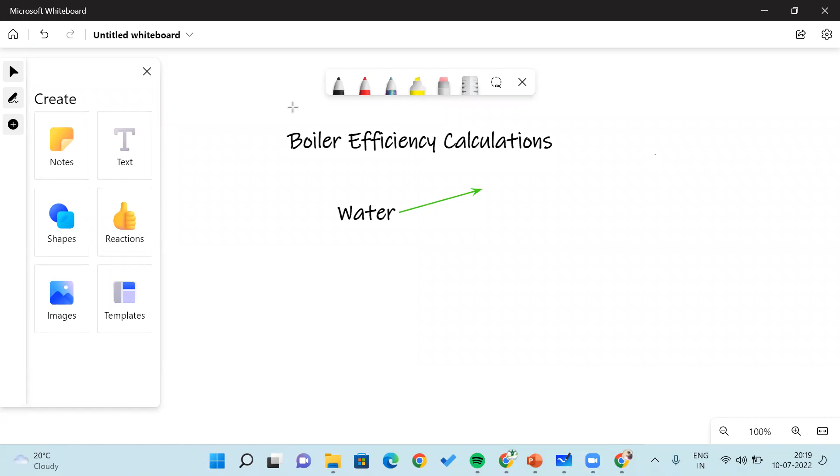The first thing is the availability of water - it's very cheap. Water is cheap. And the second thing is that water's specific heat is very high - the amount of heat that water can carry is very high. The specific heat of water is high, the CP value is very high.

And the third thing is, it is cheap and available, and the latent heat of evaporation is very high. In order to convert water to steam, or steam to water, the latent heat of evaporation is very high for water - the latent heat is very high.

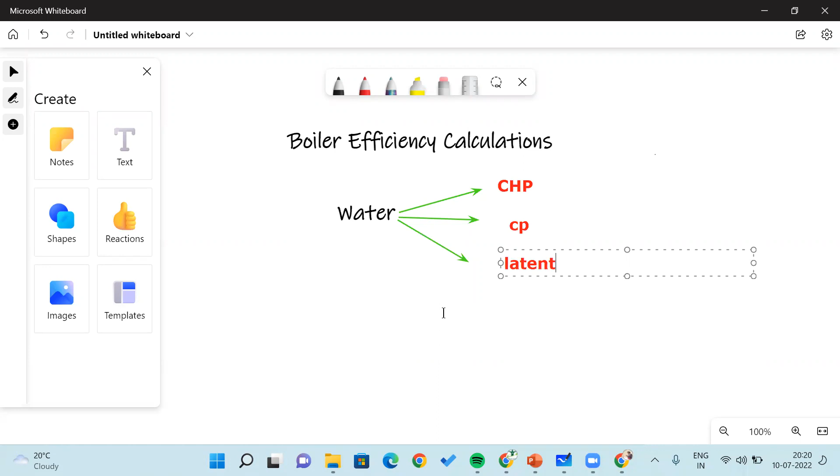Okay, latent heat is very high. And the final one, as somebody said, it's a universal solvent. But actually we are not directly mixing with anyone. Here the water is non-reactive to many of the materials. In industries, what are the materials that you're using? Mostly compared to other substances, other compounds, it is non-reactive. So this is another main reason. So these are the 4 reasons why you are using water.

For example, let's say first thing, why you have to use water: because it is cheap. Because it reduces your operational cost. Water is cheap and easily available. So that is the reason we are able to use it for operations where the operational cost is less. That is the first thing.

And the second thing is that the specific heat is very high. When the specific heat is very high, it can transfer more amount of heat. For just 1 degree temperature rise, it can give a more amount of heat. That is because the specific heat is high.

That is another reason. And the third thing is the latent heat. If the latent heat of evaporation is high, for example, let's say you are using water in a heat exchanger, because its latent heat of evaporation is high, even after heat transfer is happening, it can still remain in a vapor state, a steam state. For example, if the latent heat is less, and the steam, after losing its heat, gets converted to liquid,

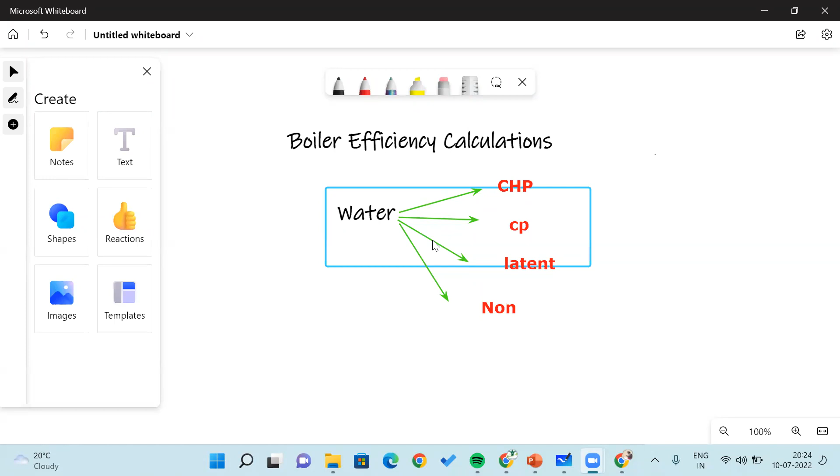So many things. But one thing you need to keep in mind when talking about water is, let's say you have a water bottle with you, and this water bottle's volume is 1 liter. If the volume of the water bottle is 1 liter, obviously we can pour 1 liter of water into it.

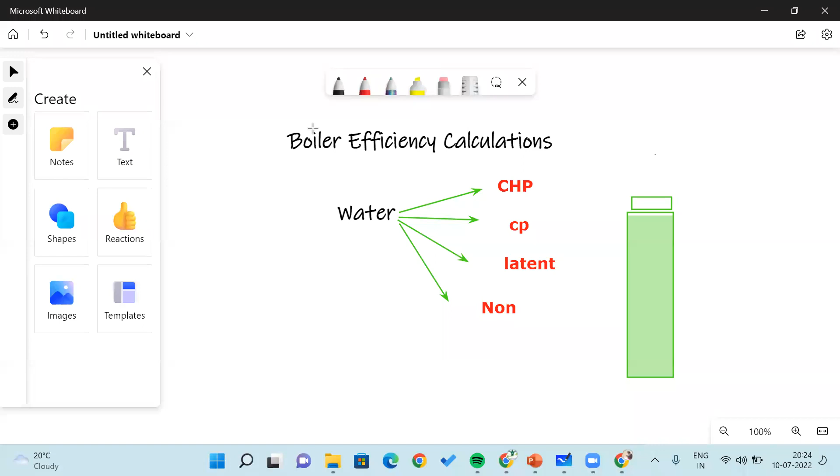And now let's say this is the vapor-liquid curve of water. So initially the water is in a subcooled zone, and from the subcooled zone it reaches up to the saturated liquid condition.

So after saturated liquid condition, it reaches saturated vapor condition, and then superheated vapor. This is the basic journey of water when you give it heat. Initially water is in liquid condition, in a subcooled zone or saturated liquid condition. But the moment water converts from saturated liquid to saturated vapor, it happens at the same temperature and pressure - at 1 bar gauge pressure, 120 to 129 degrees centigrade is the saturated temperature.

At that point, the specific volume is very less - you can put 1 liter of water in a 1 liter bottle. But after that, the water converts to saturated vapor at the same temperature, taking latent heat. Then you require 8,000 times more volume. That means to put 1 liter of water in a saturated vapor state, you'd require 8,000 water bottles - just by changing temperature, getting from saturated liquid to saturated vapor condition, the volume drastically increases.

So when there is a sudden change in volume because of a small difference in temperature, you can see a huge explosion. That's the reason the boiler is the place where water converts to steam - there's a huge specific volume change, requiring very huge volume. That's why when designing a boiler, we don't design it like a normal vessel or normal closed equipment.

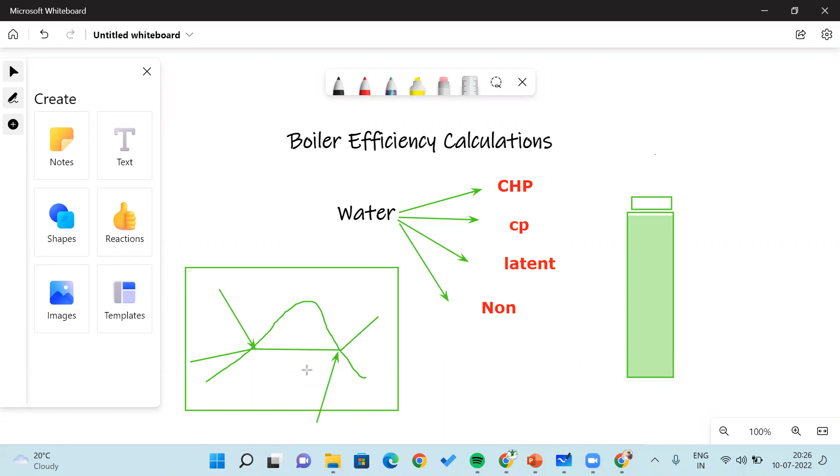Now coming to further discussion - this is the place where, as I told you, we are talking about different applications. There are different kinds of things available here: heavy users, medium users, and light users.

The heavy users are food, pharmaceuticals, oils, and other industrial level applications. When it comes to medium users: HVAC systems, cooking, chilling, fermenting, treating, cleaning - all these are medium users. And very light users are electronics, horticulture, and humidifying. So you can divide these into three categories: heavy, medium, and light users.

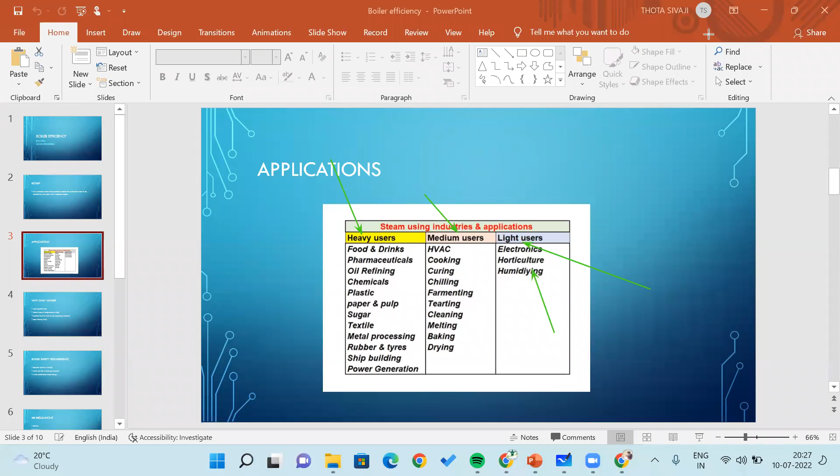After that, we discussed why water is used - we already discussed high specific volume being a major reason, and the boiler acts like a fired gunpowder. When there's a sudden change, that 1 liter volume converting to 8,000 times more, obviously it's like a fired gun. So the vessel design comes under the category of fired pressurized vessel design.

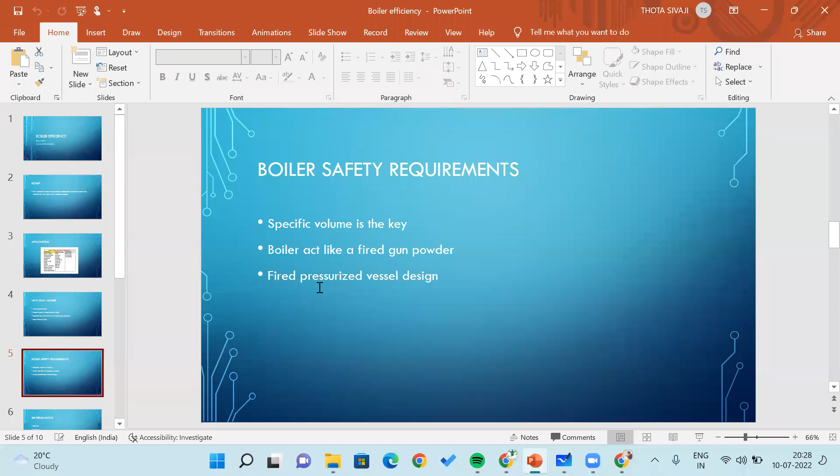In such a category, you have to design with a lot of regulations. Now coming to what I've explained till now - these are basics, very basic things related to boilers. Once again, if you read any PDF, I will share one with you, you can get more knowledge related to that. There are IBR regulations.

What are these IBR regulations? If the boiler - any enclosed volume - if you're trying to heat water or convert water into steam, if there's an enclosed vessel and you try to heat it, whenever the volume of that particular thing is greater than 22.75 liters, then it comes under IBR. That boiler needs to be designed as per IBR regulations - there are many huge regulations. If you search IBR regulation on the internet, many standards will come up, and based on all those standards, it needs to be designed. So if the volume of an enclosed vessel crosses more than 22.75 liters, that is one thing to note.

Or else, when you're operating an equipment like a steam engine, when you're converting water to steam which is greater than 3.5 bar gauge pressure, at that time also you have to go for IBR regulations. It needs to be designed as per IBR regulation.

And the third thing is the steam piping. When steam is moving through a pipe, if the piping is greater than 245 nominal diameter, then also we will use IBR regulations as a boiler standard. So if you just type IBR regulations in Google, different standards will come up. So these are the limits.

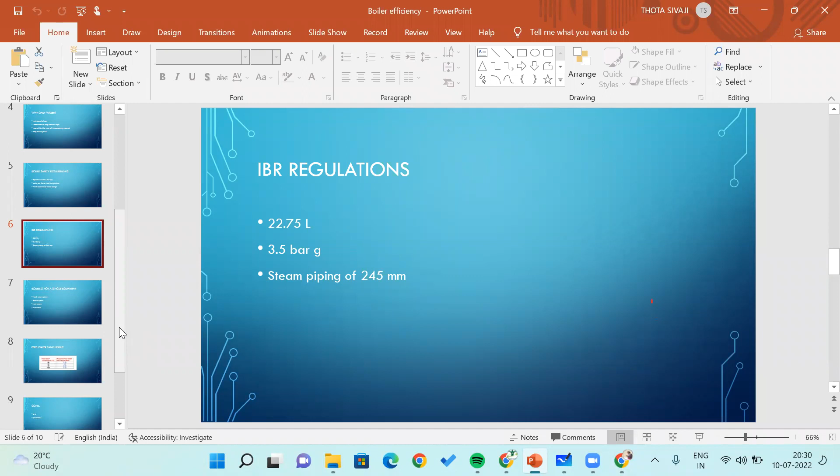Now, when you are talking about a boiler - we just discussed a boiler - remember, a boiler is not a single equipment. Like when you say distillation column, there is a reflux drum, a reboiler, a feed pump - the distillation column has different equipment, different setup. Similarly, a boiler is not just a single equipment put there. The boiler is a combo of different kinds of things. Many things are involved in the boiler combination.

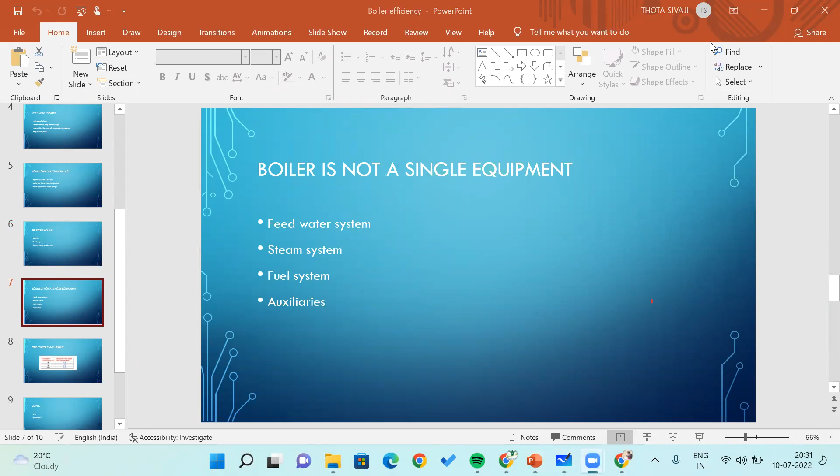So here I'm mentioning feed water system, steam system, fuel system, auxiliaries - there are many things mentioned in a boiler. So if you look at a boiler, generally, if you go for a general schematic diagram of a boiler, consider this is a boiler - what are the inputs for the boiler? As per your knowledge, what can be the input for a boiler? If you consider that entire boiler system as a vertical box, what are the inputs or outputs for the boiler, as per your opinion?

Rajneesh said feed water plus fuel. Process steam or outputs - Manupali, Badri Narayan said treatment dosing chemicals.

Okay, we will discuss one by one. I think you already know, but to type it or for your imagination, it takes some time. But anyway, I will explain one by one.

So first of all, you require fuel. Fuel needs to be entered and burned, and it needs to give heat. So fuel is required as an inlet, that's the first thing. The second thing is you need to give water. Once the fuel is giving heat, who needs to absorb the heat? The water needs to absorb the heat. So we require water.

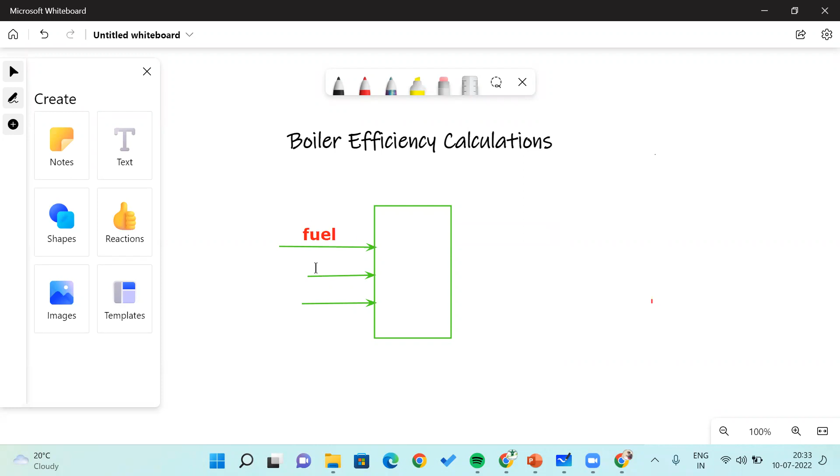And just by sending fuel, it's not going to give you the result. We also required air supply. So we required fuel, we required air, we required water - these are the things that are required. And when you're giving all these things as inlet, what comes out? We are getting steam as an outlet, because that is the major product for us. That is steam.

We require steam, and because there is a burning process, you can expect some flue gases. There's an expectation of flue gases, and since we don't know what kind of fuel is being used—solid, gaseous, or liquid—there's some ash formation that will occur, and that ash can come out of it.

If you are giving water, the water is getting evaporated. Once the water evaporates, the TDS in the water increases—the dissolved salts and everything gets increased in concentration in the boiler. Because of that, you need to give a blow down option. There is a blow down option, so we need to go for a blow down.

When you're going for a blow down, there's again an option of makeup water to the boiler that you can add, or you can ignore that. So we have different inlets and different outlets to the boiler: inlets of fuel, air, and water, and outlets of steam, flue gas or effluent gas, blow down, and ash. So this is the overall situation.

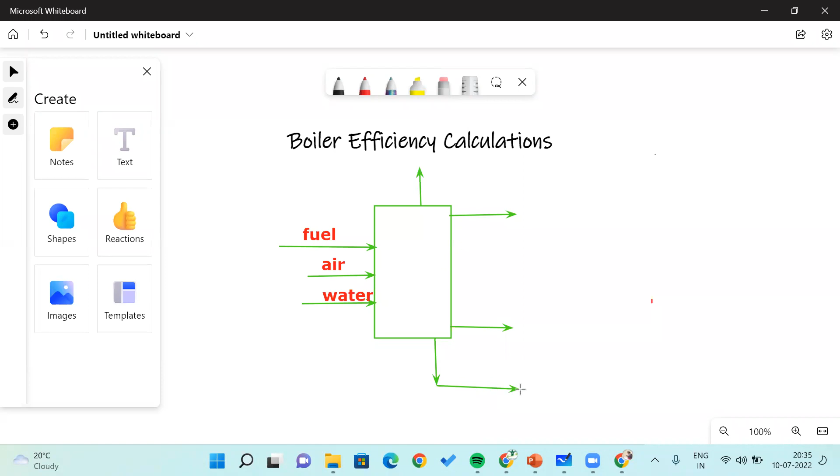Let's look at the different kinds of things entering the system. First of all, fuel. There are three kinds of fuels: solid fuel, gaseous fuel, or liquid fuel.

For example, when it comes to fuel, let's say we have a coal particle. If you have a coal particle and you're burning it, you require oxygen from the atmosphere—from different directions oxygen needs to be supplied, and then it burns. After some amount of burning, what will happen?

After burning, some amount of energy is released, and there will also be formation of ash. Whatever ash is formed, it is not allowing atmospheric oxygen to reach the surface for further burning. So because of this burning process, the ash that was formed is not allowing oxygen to reach the inner surface, and because of that there is a chance of reduction in combustion. So the ash acts as a mass transfer resistance.

So when you're giving solid fuel as an inlet to the boiler, there may be chances that formation of ash or other products acts as a mass transfer resistance to oxygen. Because of this, there are efficiency regulations related to the fuel feed. That's why there are different systems like the pulverization unit.

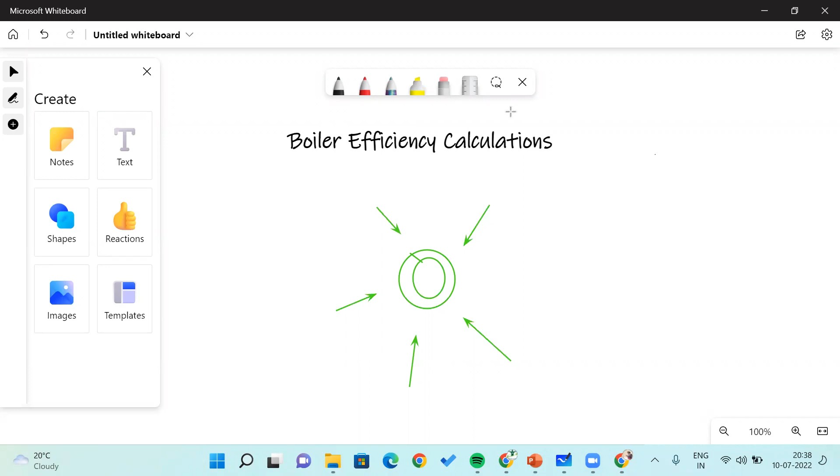Now when it comes to water—the boiler feed water needs to have a particular quality and meet certain requirements. You should not have dissolved gases, and you should not have other kinds of salts like magnesium or calcium.

You should not have such kind of salts in the water, because if the water entering the boiler is too dirty and has too many pollutants, it is going to scale up the boiler tubes and rupture the entire tube. This requires huge maintenance and causes damage, which costs a huge amount of capital for the industry.

That's why the boiler feed water should have a previous pre-treatment, like RO plants, based on your requirement. Based on whether you require demineralized water, you need to pre-process the water. So whenever there is water entering, it needs to be pre-processed first, there should be a pre-processing unit for the boiler water which is entering.

After the water is pre-processed and clear, whatever water comes out, which is very well cleared, needs to go to a feed water tank. Whatever the feed water that we have, which is purified, that needs to go to a feed water tank.

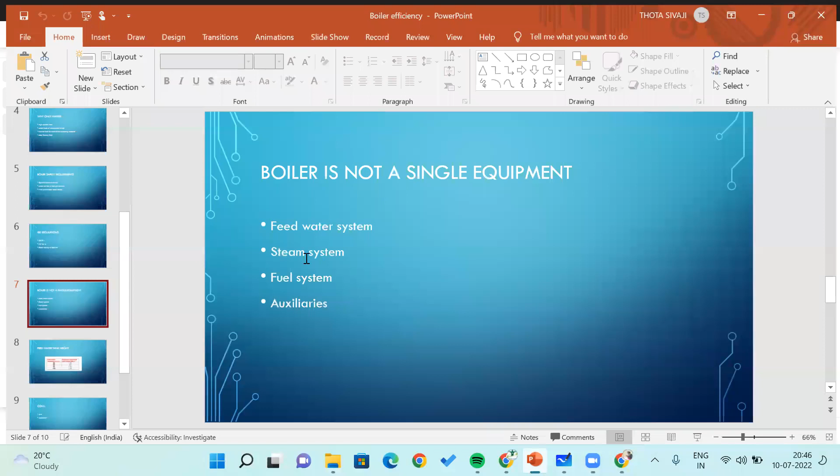There are some ground rules here. If the feed water temperature is 86 degrees centigrade, then the height required is 1.5 meters. If it's 90 degrees, 2.1 meters. If it's 95 degrees, 3.5 meters. If it's 100 degrees, 5.2 meters. Like this, you need to maintain height in terms of meters from the ground - these are the feed water tank heights.

Like this, there are other things like boiler feed drum and deaerator tanks also, which we will discuss - we are not going to discuss that part now. But the boiler feed water system is very important to learn about - some schematic diagrams that you need to understand, because most of the energy integration that you are going to use is at the boiler feed water system, and you need to understand the basic things related to the boiler also.

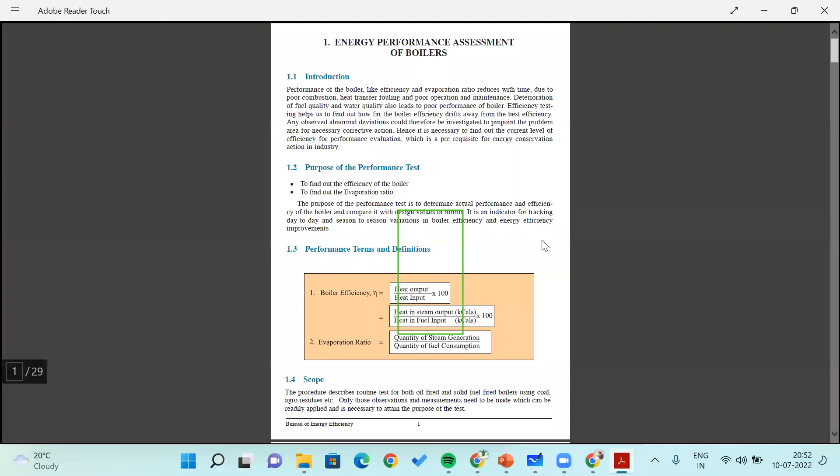Okay, so look at here. I'm going to share this PDF with you all later, for the people who attend this particular session. So for anything, the efficiency is nothing but heat output divided by heat input into 100. Output divided by input into 100, that is the basic. So now, what is the input and what is the output to the boiler?

So let's talk about the inputs. We are having a fuel input, an air input, a water input. And we are having a steam outlet, a flue gas outlet, a blowdown, and an ash out. So like this, we are having different kinds of things.

So now, what is the heat input to the system? The amount of fuel burning, the amount of energy that it gives, is the heat input.

For example, 10 kg per hour of fuel is entering. So the 10 kg per hour of fuel into its gross calorific value is nothing but the amount of heat that you are giving. That is the input.

And what is an output? Here you are getting flue gases, blowdown, ash — these are all not output. The major product for the boiler is steam: how much amount of heat it has gained. Initially we were having some water, and after that it's converted as steam. So the gain, how much amount of heat is gained, is only the output.

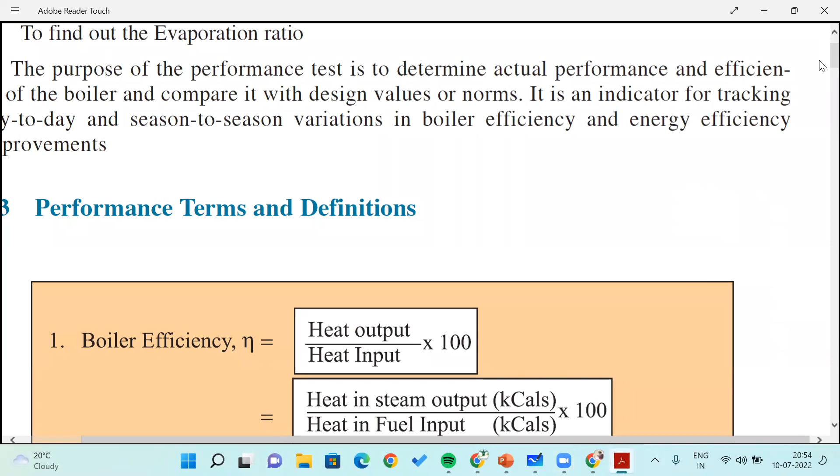You can write it as heat output divided by heat input into 100. What is heat output? Heat output is nothing but heat in steam output. So the whatever heat that is there in the steam is output, and heat in the fuel is input.

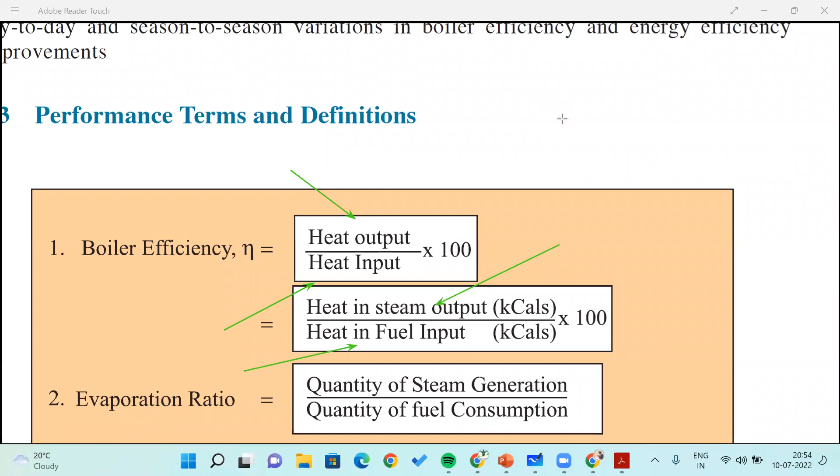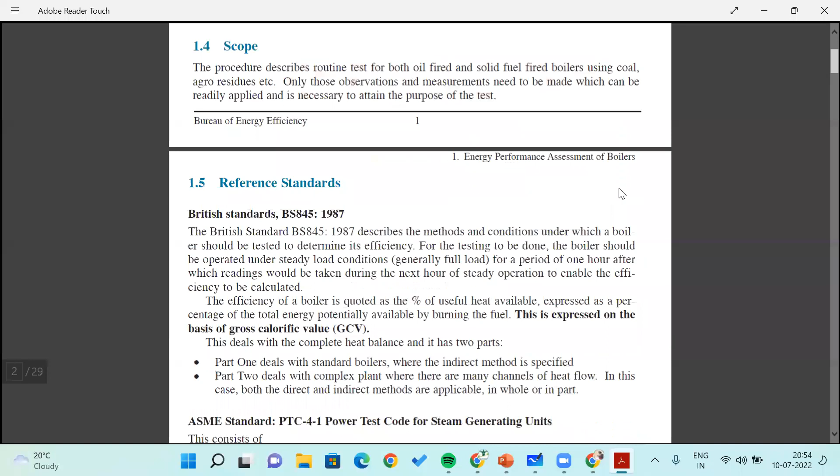So now, how can you write it? For example, this is a system where we are having fuel input plus air, and there is a steam outlet coming and the flue gas is coming, and then we are giving a water inlet.

Now, the energy output is nothing but the energy added to the steam. The water is taking heat and converting into steam. So that means it is the energy added to the steam. Initially, water is at 35 degrees centigrade, and it takes heat up to 120 degrees centigrade and is converted as steam and leaving. So 120 degree steam's heat minus 35 degree water's heat is nothing but heat gain.

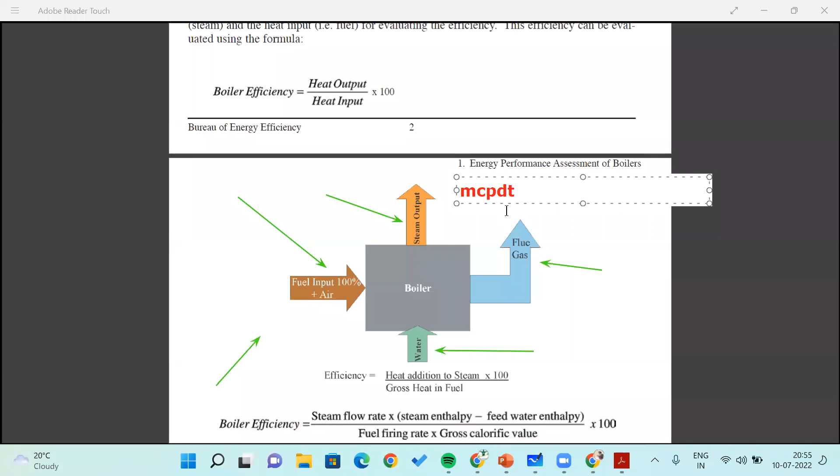The steam which you are having has a value of Q equal to MCP delta T. This has some delta T value. And here the water is also having some MCP delta T, which also has some delta T value.

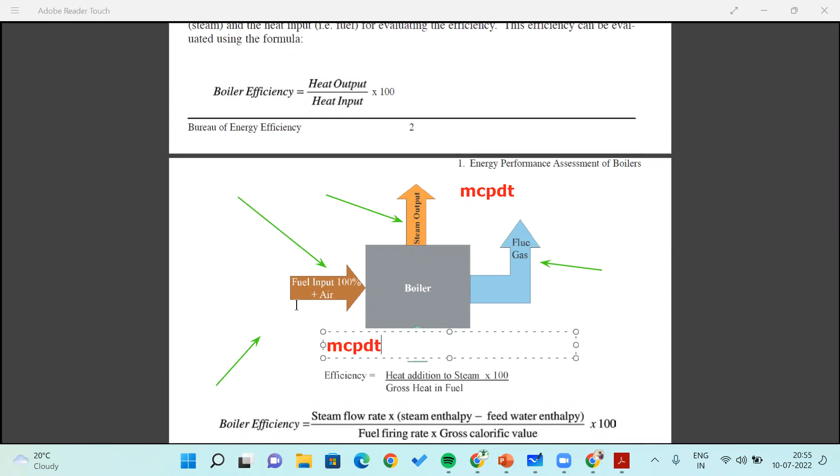So the difference between the output and input for the water is how much it gained — that is the heat taken from the system. So that is the output, the value that you're getting. So that is the heat addition to the system, which is added.

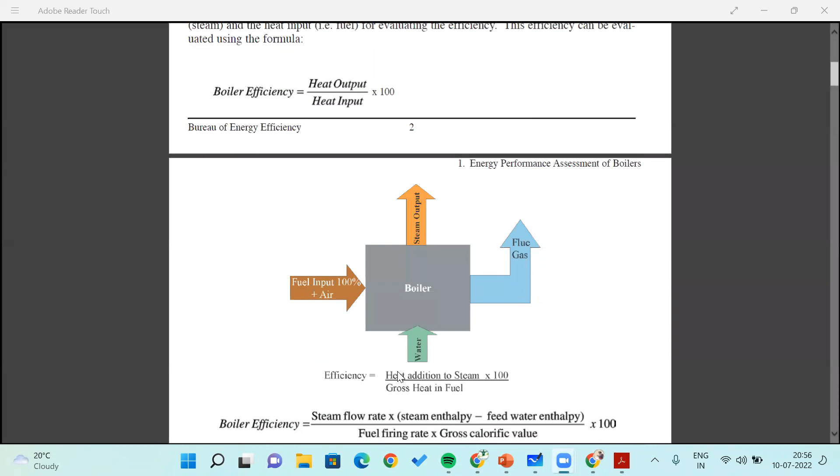See, the steam flow rate is the same — the overall amount of volume, the mass is same — and then we take the steam enthalpy and the water enthalpy. Then there's the fuel firing rate: as I told you, 10 kg per hour into the gross calorific value into 100. So this is the basic formula.

The basic formula for boiler efficiency is the direct method. It is just a direct method. For example, if I — just a minute.

Just a minute. Yeah.

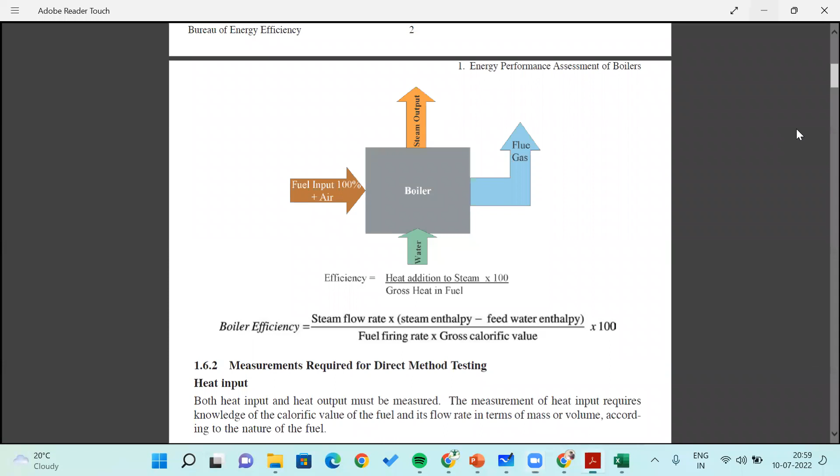So that is the reason there is an option of indirect calculation. Indirect boiler efficiency calculations are coming into the picture. I will give you the idea about indirect boiler efficiency calculations now. Indirect calculations are very important. Now we are going to talk about that one - indirect boiler efficiency calculations. So what is it exactly?

Let's say we are having a boiler. As usual, what is the inlet? Fuel is inlet, air is inlet, water is inlet - air, fuel, water. The outlet is the steam, flue gases, boiler feed water, blow down, and then we are having ash or something like this. So we are having something like this.

Let's say water is entering. So obviously the firing is happening, so definitely there is a very huge amount of temperature in the boilers - because of the fire burning, very huge temperature, like 300, 400 degrees centigrade. So very huge, incremental temperature. Now tell me, we are having air. What is air? Air is nothing but oxygen plus nitrogen and some other inert gases.

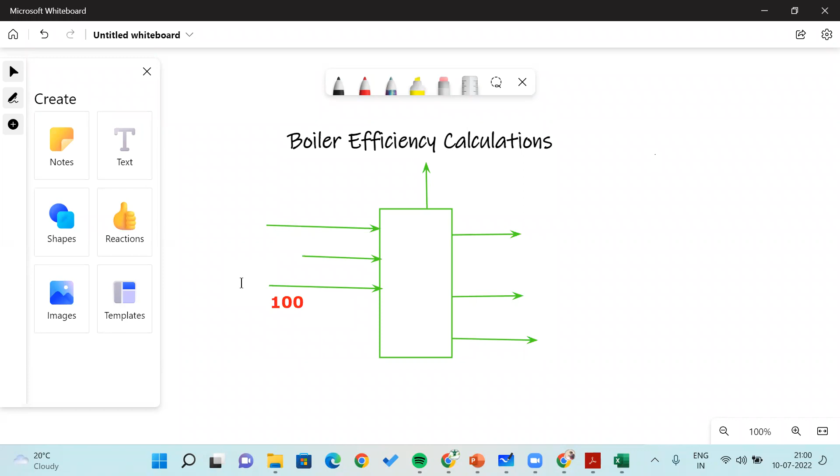For example, if you are taking 100 kg mole of air - let's say 100 kg mole of air - out of that 100 kg mole, how much air am I really using? I am using 21 kg per hour of air, or 21 kilomole per hour. That means the air contains both nitrogen and oxygen, but in the practical case, only oxygen helps the burning process. So the oxygen gets burned, but the remaining nitrogen, whatever amount we have, enters the boiler, takes the heat, and leaves.

So that means the nitrogen is storing the heat. The nitrogen comes at a normal room temperature of 35 degrees centigrade as air, and it enters the boiler and takes heat at 300 degrees centigrade, and then leaves. That means it's storing the heat, it's taking the heat. For example, you are having 100 kg mole of air here. Let's say that we are having a fuel firing rate of 15 kg mole per hour.

If the 15 kg mole per hour is a fuel firing rate, for one mole of fuel if you require 1 mole of oxygen, but you are having 21 moles of oxygen, you require only 15 moles of oxygen, because 1 kg mole of fuel requires 1 kg mole of oxygen. For example, CH4 plus oxygen gives CO2 plus H2O. If that is the equation, 1 mole of methane requires 1 mole of oxygen to burn. In this case, for 15 kg mole per hour of fuel, you require 15 kg mole of oxygen, but you are having excess amount of oxygen.

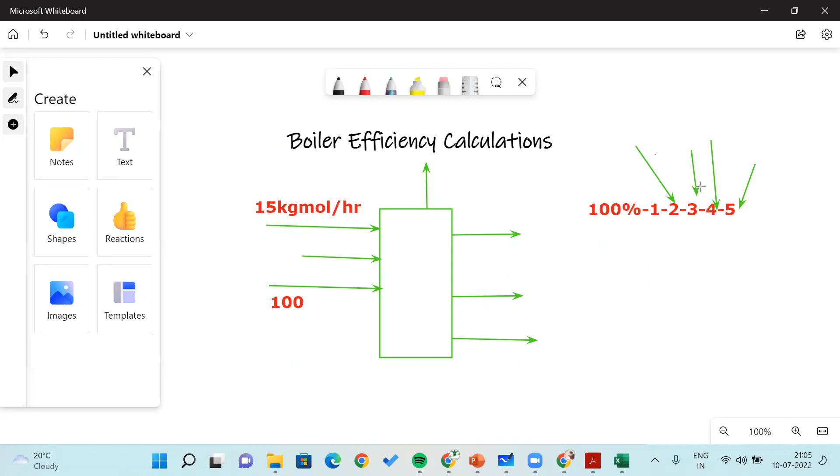Now we would like to look at the same in the PDF.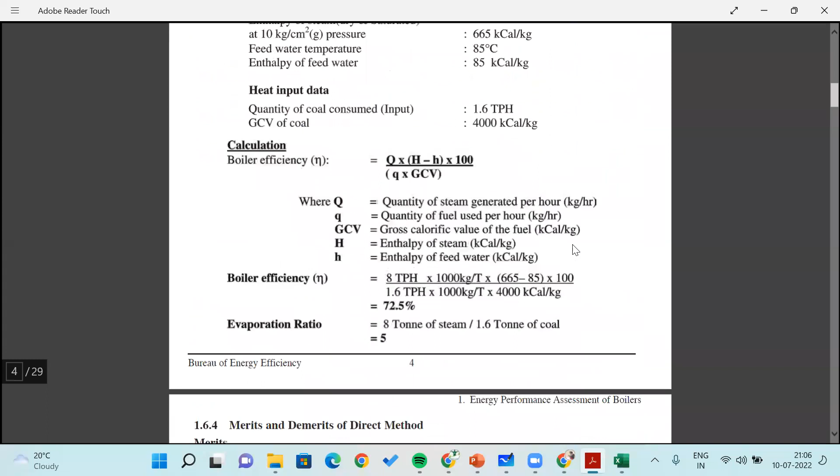Okay, now look at this, this is the indirect method. So there are different losses. Dry flue gas losses - what are the flue gas that you are having? What are the gases, like when methane is burning, so obviously what will come? Carbon dioxide, hydrogen will form. So whatever reactant is coming, whatever gas is forming in the reaction is also taking heat, so the dry gas is having a loss.

And H2 loss, as I told you, if there is a presence of H2, that is converted to water, so that is also a loss here. And moisture in fuel, moisture in air, as well as CO loss. When does CO come? When there is no proper combustion, when there is incomplete combustion, then CO will form, meaning the fuel is not burning properly. So that is also a loss, that is the CO loss.

And then fly ash loss - that means ash loss is nothing but when these flue gases are going out, there is some ash which comes from the stack, so from that also there is a loss. And you can see from the bottom, ash loss, obviously there is ash which is coming, that is also having some loss. And then there is a blowdown loss.

So 100 minus, okay, efficiency is nothing but 100 minus first loss, second loss, third loss, fourth loss, like this. All these things will come up with the indirect method. Okay, all this will come into the picture, and then they will end up with what is called the indirect method.

And there is another loss called surface loss. Because every body which is greater than 0 kelvin radiates, so there is a radiation loss also there. If there is no proper insulation, obviously the convective losses are also there. So there is a loss.

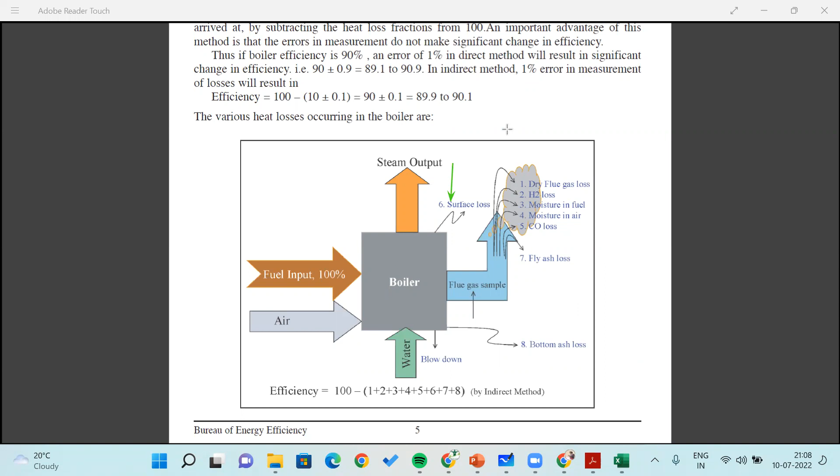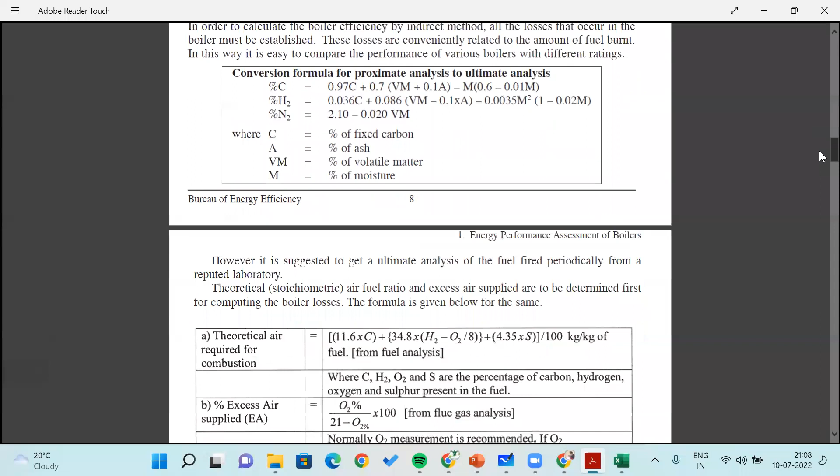Now, so here for each and everything, we have a formula, a defined formula. Let's say heat loss due to dry flue gases - for that we have a formula: M CP delta T divided by gross calorific value of fuel, into 100. So in order to find out the L1 loss, we have this formula: M CP delta T, temperature of flue gas minus temperature of air, ambient air, divided by GCV. So this is the formula.

If you are able to know - okay, you need not to mug up the formula, you just need to understand what is L1. That is because of dry flue gases. So for the dry flue gases, this is the formula. So if you have the data, you just need to substitute the values and you will get the loss because of flue gas.

Okay, you need to get this kind of data. You need to know what is the temperature of the flue gas. So there you need to take all the parameters, study all the parameters on the boiler. You have to be ready with all the stuff, and then you need to go for calculation. So this is the loss because of L1.

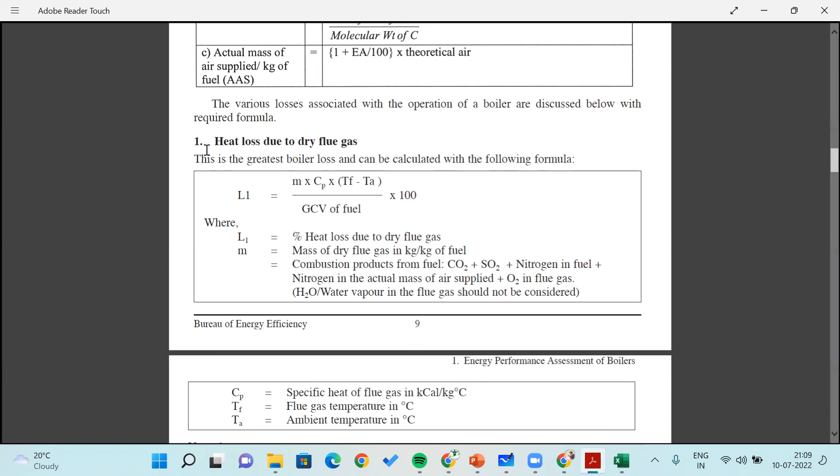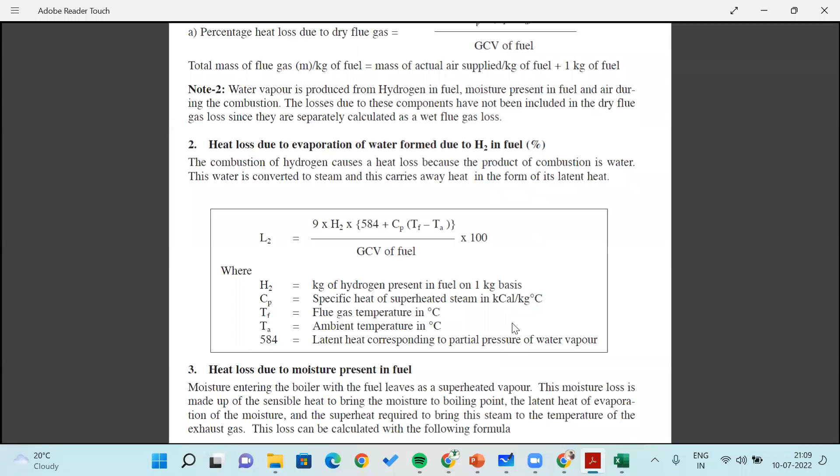And then heat loss due to evaporation of water formed because of H2 in the fuel. If there is H2 in the fuel, there is formation of H2O, and because of that, what is the loss? Here already they calculated all the parameters, all the mole balances, and end up with the formula: 9 into H2 into 584 plus CP. So what they are doing is simplifying the formula, and this is the final formula for L2. Directly we can put 9 into H2, all the values here. The data is there - you need to get all the data from the boiler, then you enter this and you will get L2.

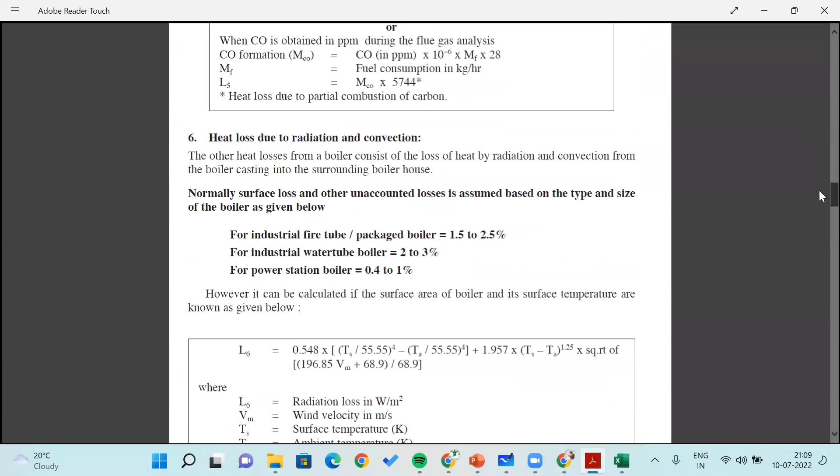So like this, L3, L4, L5, L6, L7, L8. So like this, all the things will come together: 100 minus (1 plus 2 plus 3 plus 4 plus 5 plus 6 plus 7 plus 8). It is nothing but the overall indirect efficiency calculation, the overall calculation where you can concentrate. If you find there is a huge loss because of radiation, what will you do? We will put the insulation.

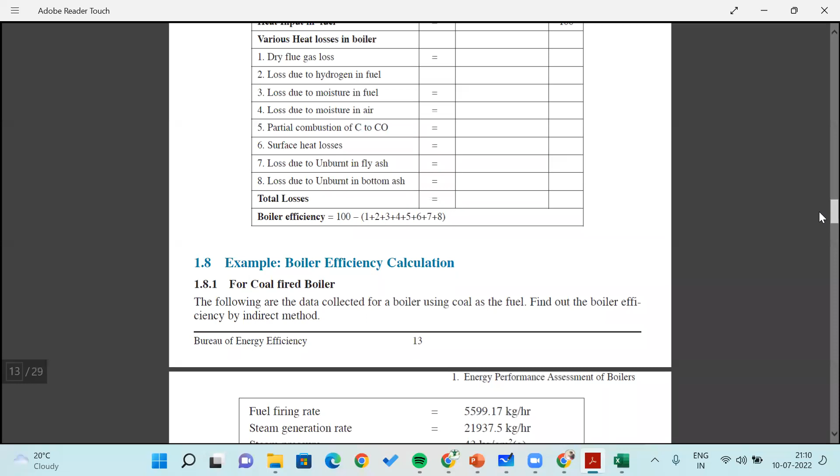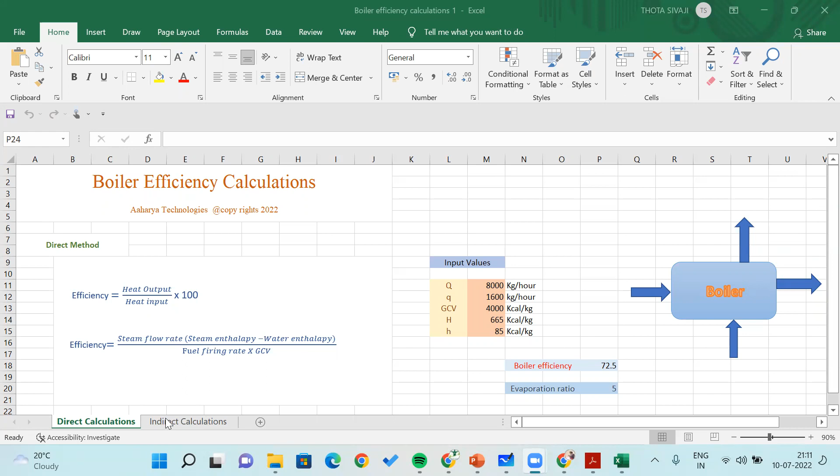That's what we will do in indirect calculation. There was a small example, and I will share this entire PDF with you, along with this example, and I will share you this Excel sheet also, for the people who attended the session. I will only share these for the people who attended. I will share you this direct calculation, and then the indirect calculations, like L1 loss, L2 loss, L3 loss, L4 loss.

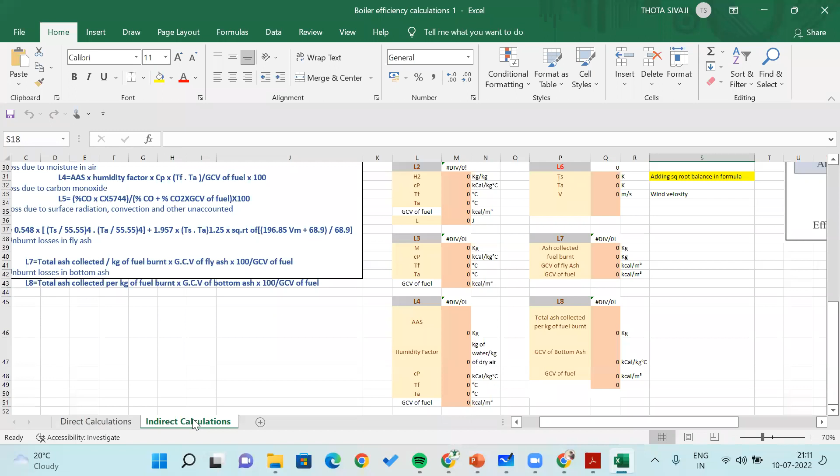So these losses are there, and the formulas also there. Just need to enter the data. You already know the formula, inputting now as a chemical engineer. If there are small mistakes, I mean, we didn't enter the data at this moment. If you enter this data, obviously you will get results here. So this is the direct calculation and indirect calculation, and the formulas and all. This is how we need to talk about boiler efficiency calculations.

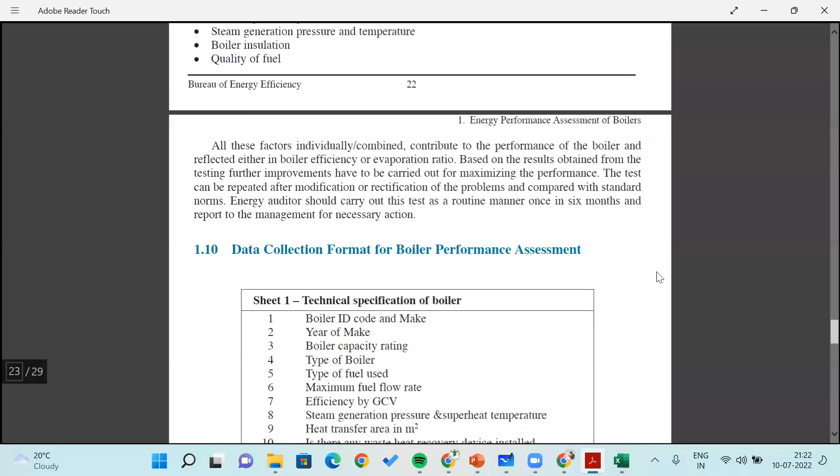No need to bother about mugging up the formulas. Just remember the process, why this loss is coming. So once again I'm repeating the losses. Once you sign up, just look at this. Once again, I am talking about losses, what that loss is, and why you need to record it.

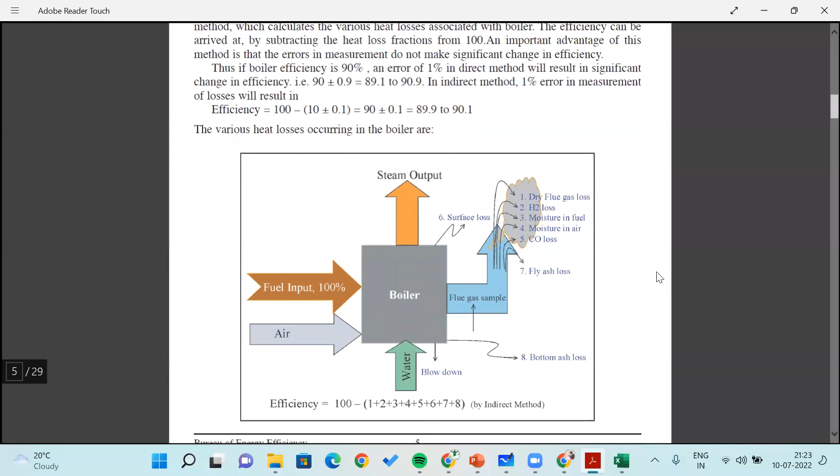The first one is because of dry flue gas. Dry flue gas happens because of the reaction: CH4 plus oxygen reacting, producing carbon dioxide plus H2O. We don't do anything, they are forming naturally, and that gas comes out as dry flue. That needs to come out because of the reaction, and that formation of carbon dioxide and hydrogen has a certain temperature as it comes out. So that is the dry flue gas loss.

That's one thing. The second thing is H2 loss. Because of having H2 in the fuel or H2 in the air, this H2 reacts with oxygen and forms H2O.

So because of that reason, there is some H2 loss. The H2 loss means because of H2 there is a loss.

And moisture in fuel. If there is a moisture, if there is a water content in the fuel, obviously the water converted as a vapor, and because it's having a more specific heat, it takes more heat and it's leaving not from the main stream, it is leaving from the flue stream, flue stack. So that is also a loss.

And then moisture in air, if there is moisture in the air, that is also a loss. And a CO loss, there is carbon monoxide, so that is also a loss. Carbon monoxide means incomplete combustion.

So when there is incomplete combustion, that means the burning is not happening properly. Then you have to check it at the burner and try other kinds of techniques in order to, as I told you initially, the thing which is forming is also acting as a mass transfer resistance. It is not helping oxygen to reach. If there is no sufficient oxygen, there is no proper formation of carbon dioxide. So then carbon monoxide will form, which is nothing but incomplete combustion, is a loss.